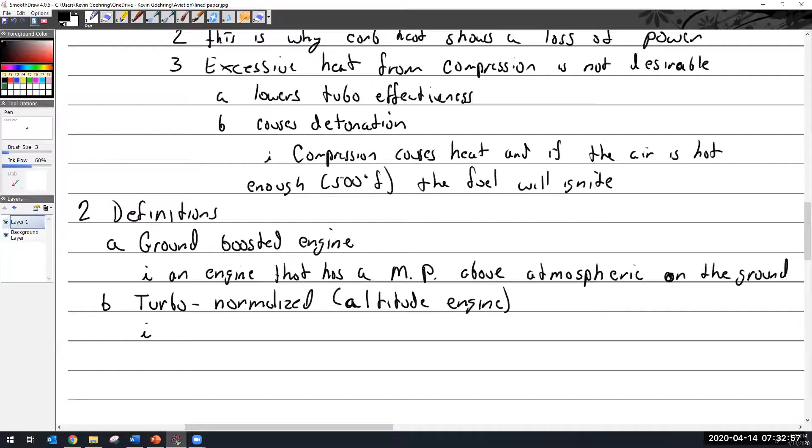So we talked about turbo normalizing and an altitude engine, which I don't like that term. That is a type of engine. The engine's not necessarily any different than any other engine. They tend to be a low compression ratio engine. Other than that, it's the same old engine. You just got stuff bolted on the outside.

So a type of engine that uses a turbocharger or supercharger. Remember, a turbocharger is something driven by exhaust gas, and a supercharger is something that is belt or gear driven, to generate sea level pressure.

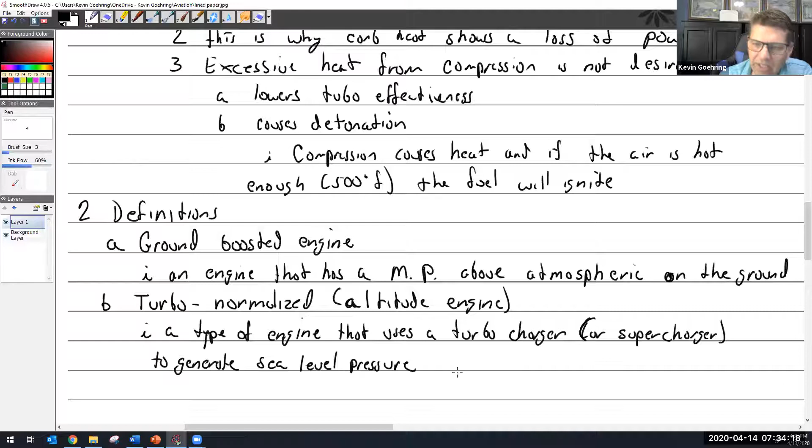Will it always be sea level pressure, or could you adjust it to a different setting? Well, you could adjust it to do whatever you wanted to. You could adjust it to give you more. It's like, yeah, I bought an aircraft and it was turbo normalized, but you know what, I own a flat blade screwdriver, so now it's ground boosted. You could do that. All it takes is a screwdriver to adjust the pressure regulators on it. But you don't want to do that. So if it's designed and operating properly, it will never give you more than sea level pressure.

Okay, that makes sense. To generate sea level pressure in its intake manifold, and that will be up to its critical altitude.

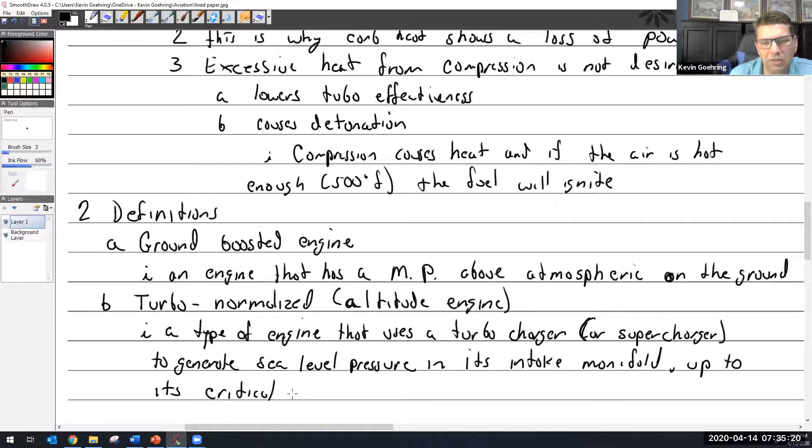Critical altitude, and I'll define critical altitude for you. So what is critical altitude? Critical altitude is defined as the altitude at which an engine can no longer produce sea level horsepower.

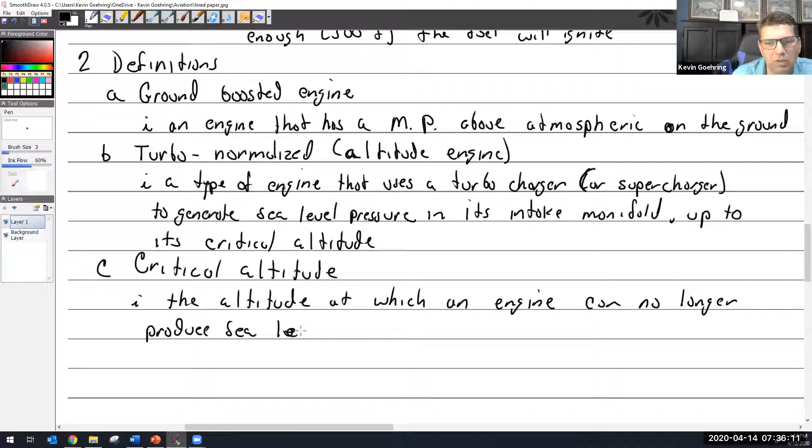All right, August, for 2 points. What is that for a normally aspirated engine? I thought he wasn't here. Well, I see a square. August, you with us? August, going once. Yeah, I'm here, sorry, I had something I had to attend to. Oh, so you're here but not paying attention. I got it, my apologies, I actually just got back. This is why I guess I don't call on people, it just embarrasses them. Oh well, hey, it's all good.

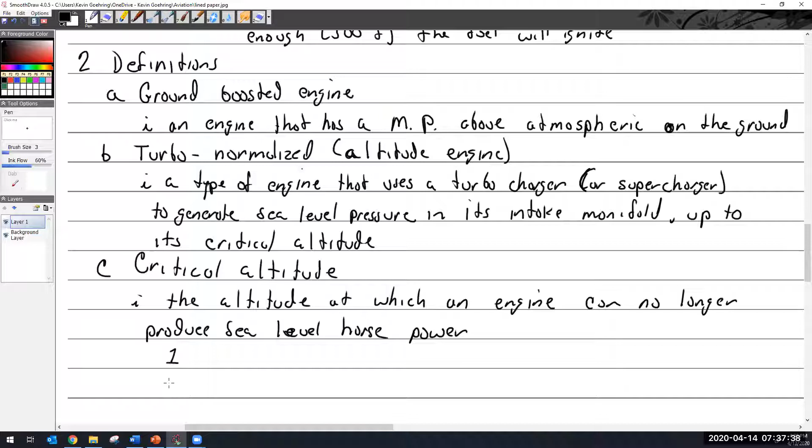It will be at sea level. It'd be at sea level, that's correct. So in a normally aspirated engine, and remember, normally aspirated engine means it has no turbocharger, no supercharger, in a normally aspirated engine, that altitude is anything over sea level.

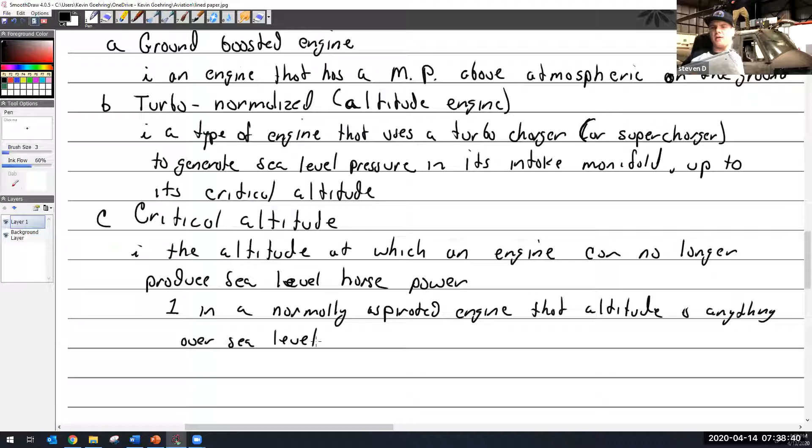So in my little Cessna 150, my critical altitude is 1 foot. 1 foot or 1 inch. Well, technically, it would be anything over where your engine sits on the airplane, because no matter what, it would be above sea level. That is true. Or your engine could actually be below sea level, like in the desert, and then you could be flying at 20 feet.

That's right. Now, if you want to go down to Death Valley and fly real low to the ground, then I guess you're going to get more horsepower, like 200 feet below sea level. But you have to be flying close to the ground, right?

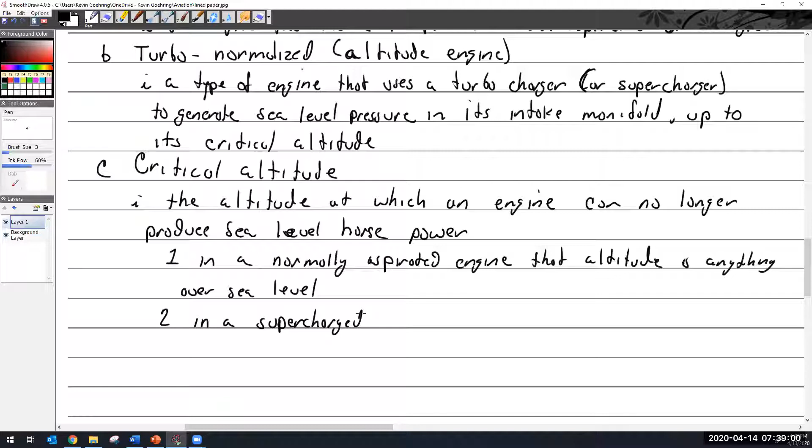In a supercharged engine, that altitude, that is the critical altitude, is much higher. 10,000, 15,000 feet, something like that. Depends on the engine and the manufacturer and how they have it set up.

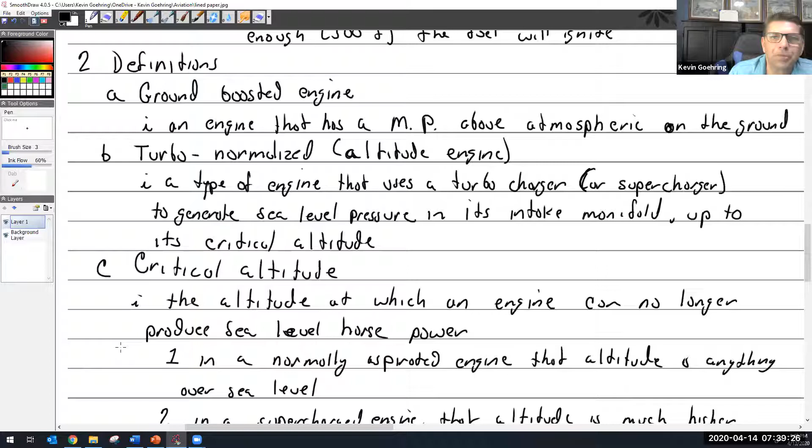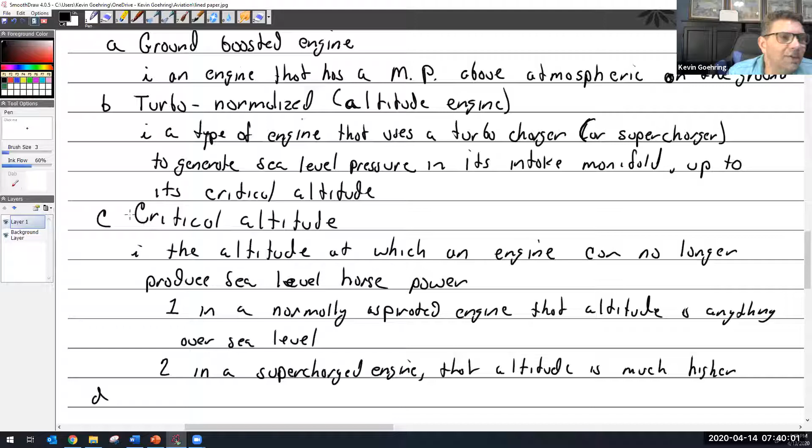Okay, so we've done ground boosted, which means it is boosted over sea level, and turbo normalized, which means that you just trick the engine into thinking it's at sea level for a much higher period of time. So if the engine had a thought process, it would think, hey, look at me, I'm at sea level and the air's hot, and I'm at sea level and the air's a little hotter, and I'm at sea level and the air's getting even hotter, and I'm at sea level. Now the air is really hot, and now it's like, okay, now I'm at 1,000 feet and the air is pretty hot, and at 2,000 feet and the air is pretty hot. It would do that. And the point where that engine realized it was no longer at sea level is what we call critical altitude.

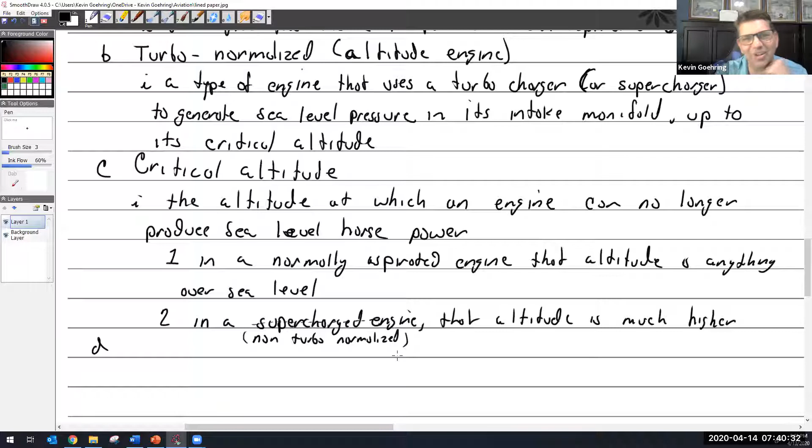So that's for a supercharged engine, or rather an engine that is not... I could have written instead of supercharged, a non-turbo normalized engine. So if it's, and I hate to use a double negative, not a non-turbo normalized engine, that is much higher. All right, D, I'll just bring D down to here. D, all right, supercharging.

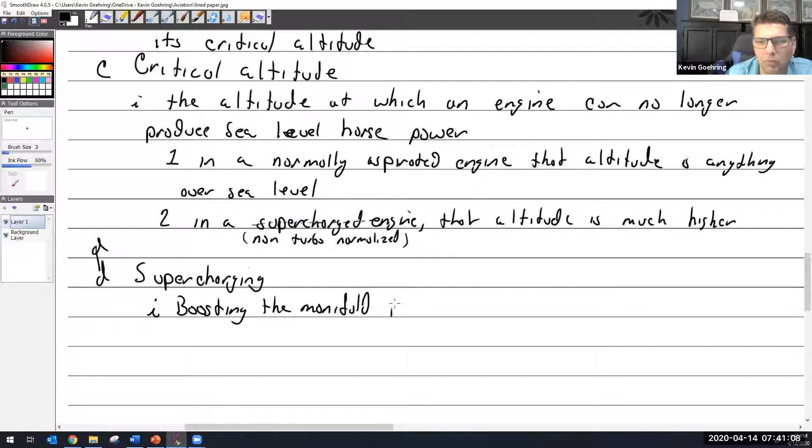Remember, there's a supercharger and supercharging—those are two different things. So I'll cover supercharging and supercharger separately. Supercharging, or as the manufacturer calls it, is boosting the manifold pressure above 30 inches.

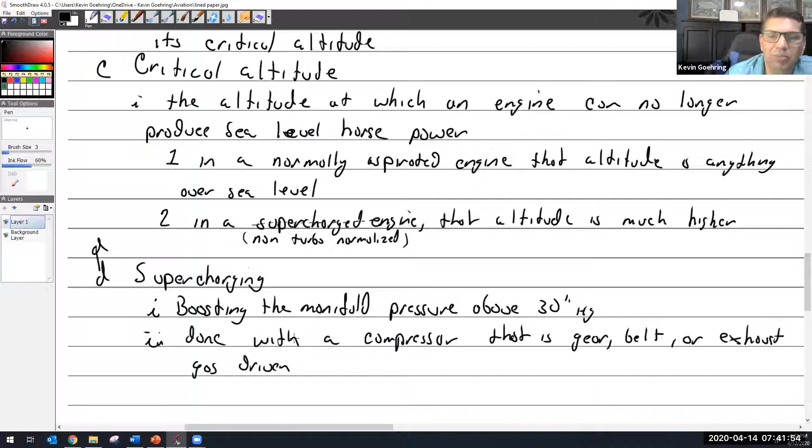How do they do that? It is done with a compressor that is gear, belt, or exhaust gas driven—just some sort of compressor. So supercharging means it has just some sort of compressor. The reason I tell you that is because Lycoming tends to do it this way.

Continental just says it's turbocharged, and they don't have a distinction in their name. Whereas Lycoming will say you may have a turbocharged engine, or you'll have a turbo-supercharged engine. So it's the distinction between the two—C-H-A-R. One is supercharging, the other has 'super' in it, meaning more than.

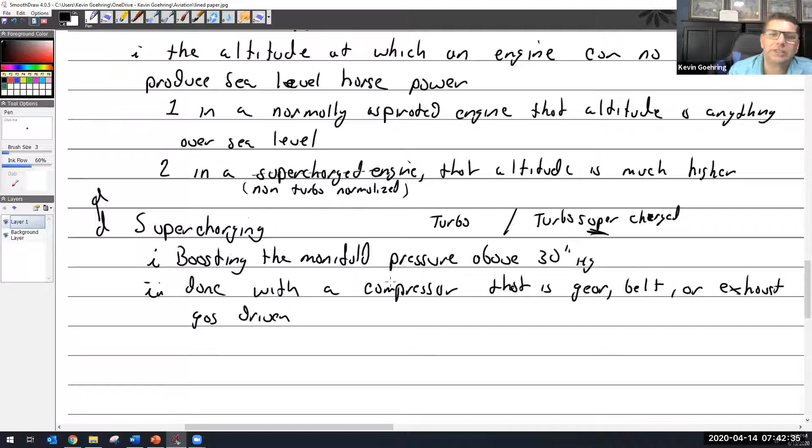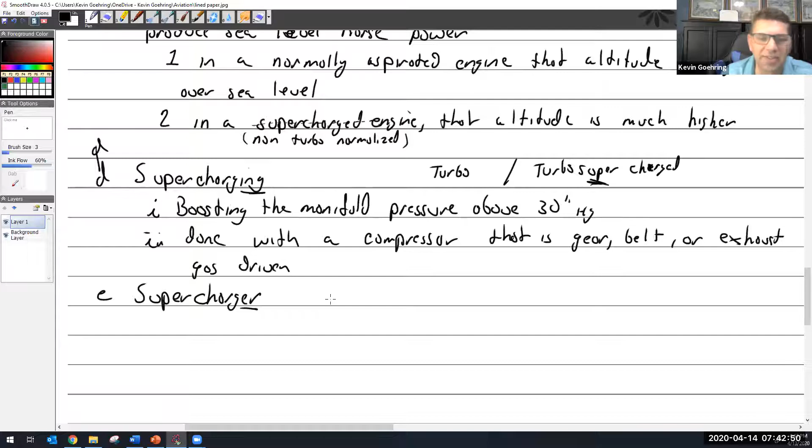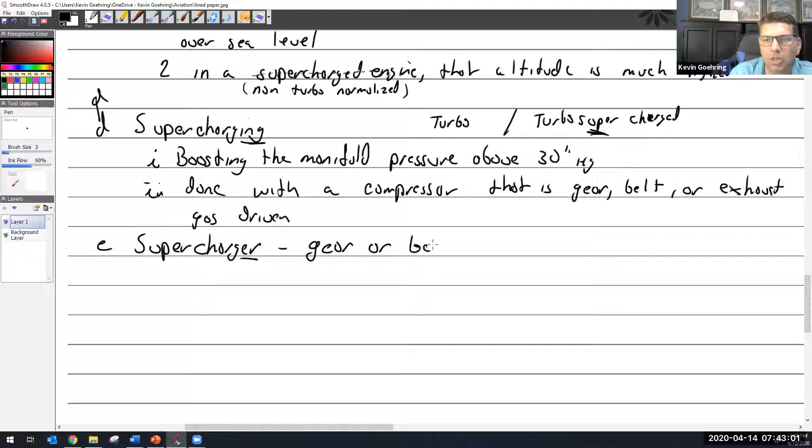There's supercharging, the 'ing', that's a thing that's done. And then I could say a supercharger—that's an item. A supercharger is a gear or belt-driven compressor.

Now, it just so happens that whenever you bolt on a supercharger, by definition it's a gear or belt-driven compressor that boosts manifold pressure above 30 inches. You don't have a supercharger that does normalizing—there's no such thing as a supercharger normalizer. When you add these superchargers, you're using a compressor, you're boosting it.

Now, if we take a look at radial engines, you guys know that radial engines have an internal supercharger, and the Lycoming R680, a 9-cylinder radial engine—if you were to take it apart and look at it, you would see an internal supercharger, but it's not. It just looks like one, tastes like one, acts like one in all respects, except it doesn't boost anything. So if it doesn't boost anything, it's not a supercharger—it's just called an impeller. All it's there for is to mix the fuel and air.

It's like the same thing in the 985, the Pratt & Whitney, or the cutaway mock-up we have in our lab—you spin the crap out of that impeller, now you start boosting the air, and it's a supercharger. So you either have an impeller or a supercharger. There's no such thing as a supercharger-normalized engine, so don't get into that. It's only something you do with turbochargers.

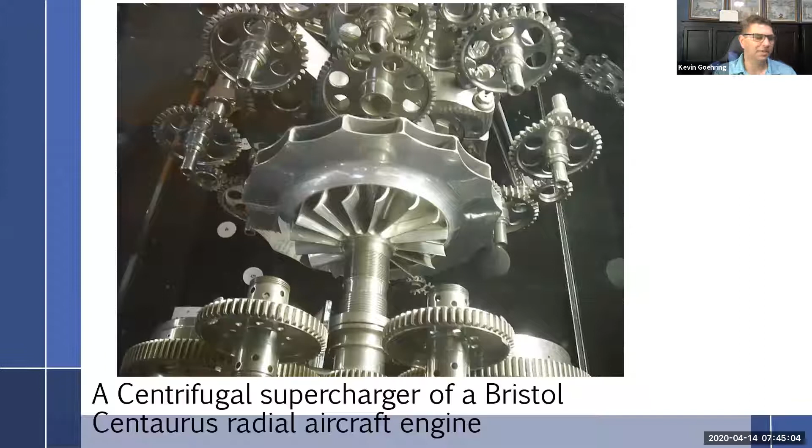Alright, so I have some pictures that might make more sense. Let me pull this over—we'll start with this current slide. This particular engine is a centrifugal supercharger out of a Bristol Centaurus radial aircraft engine. I found it on the internet—whoever took this picture, I love it. You can see all the gear mechanism that would be in the accessory case, and somewhere in the middle you have this impeller, which spun fast enough becomes a supercharger.

What kind of compressor is that? Centrifugal—it says it right there. Air comes in the middle, is spun to the outside, compressed, and goes around to the cylinders. Based on our studies with the pressure carburetor, the fuel and air is already mixed at the pressure carb, put in here, compressed, spun out, compressed again. So there's an integral supercharger.

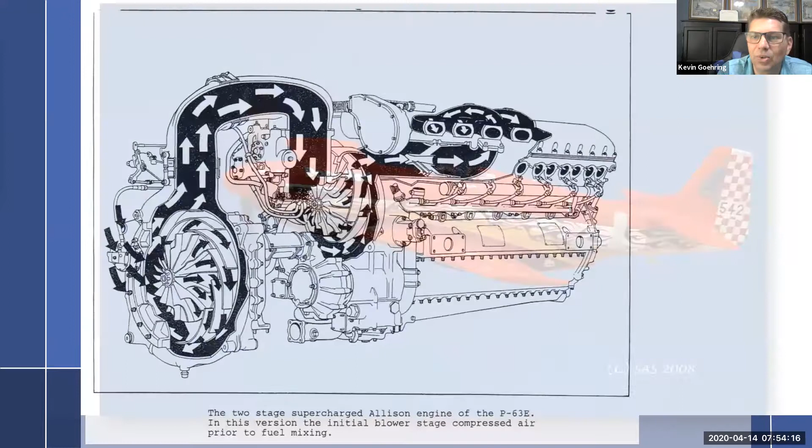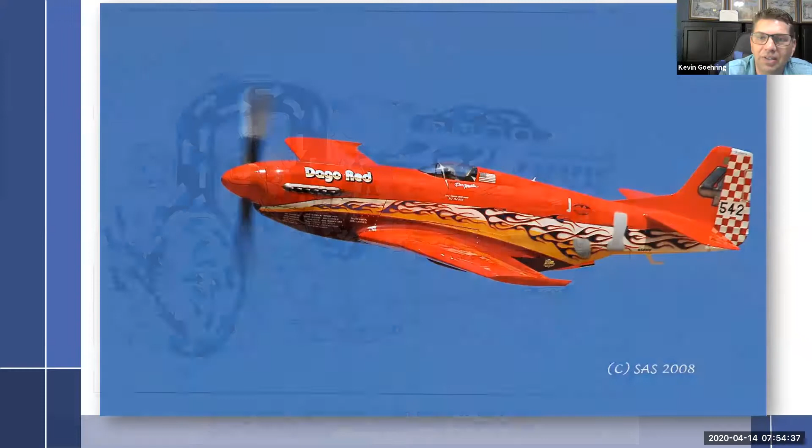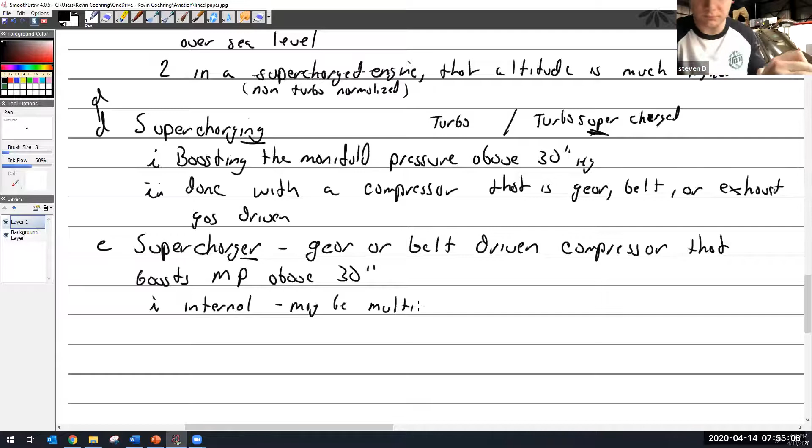So, okay, and we can get rid of this. All right, so supercharger, and let's see, so that was, I showed you two types. We had the internal, we could say maybe multiple stage. And then I showed you the external belt driven.

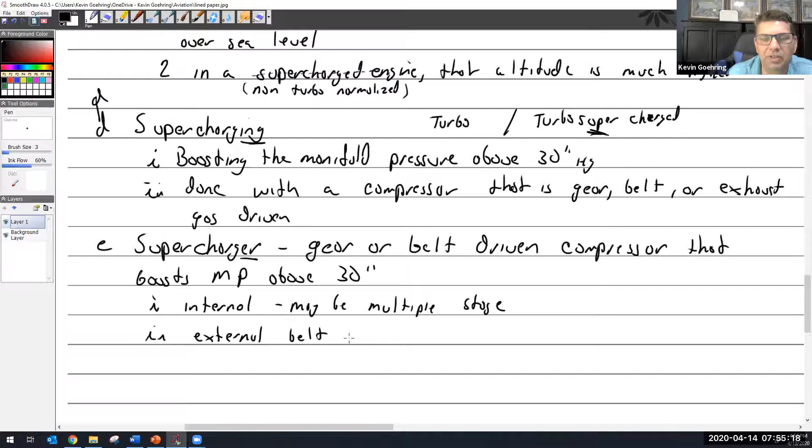There's some really old movie, I think it was like Mad Max or some stupid thing, where he had some sort of car with one of these big blowers on top, but he had it hooked to a switch where he could turn it on or off. That always bugged the heck out of me, because it seems to me when you're looking at a blower like that, it doesn't have a bypass on it. So I always thought that wouldn't work. Getting way off the subject here, but you see.

So if air is coming in, it has to come in and through here and up in this case, and there it goes, comes in here and around. There's no way around, so if this thing isn't spinning, it looks to me like it would block the air. I don't know how it would get around. That does not make sense. It would almost have to have like a double intake with the supercharger being on a clutch. Yeah, it was like a clutch like you'd see on an air conditioning system.

All right, so we had the external belt driven. Like I said, I've never seen this in aviation use, and I'm just going to say it's the Roots type. You'll talk more about the Roots type blower when you get into cabin pressurization. There are actually some aircraft that use some of these things, old aircraft. All right, so then we get into the turbocharger, which is where we're really going to spend most of our time here. And a turbocharger is an exhaust gas driven compressor.

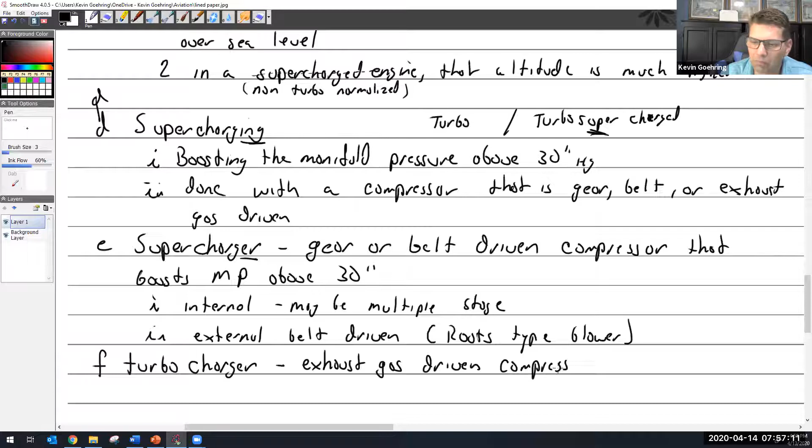Excuse me, Kevin, on the supercharger, do you need to cool the air? Because when you compress air, it becomes more temperature, right? It becomes hotter. So do you need to cool the air?

Well, it really helps. When you do cool the air, that's called an intercooler, and we'll talk about those. But intercoolers add restriction, and restriction means you have to boost more, and you have more weight, so they add complexity. But you can't see that with this supercharger.

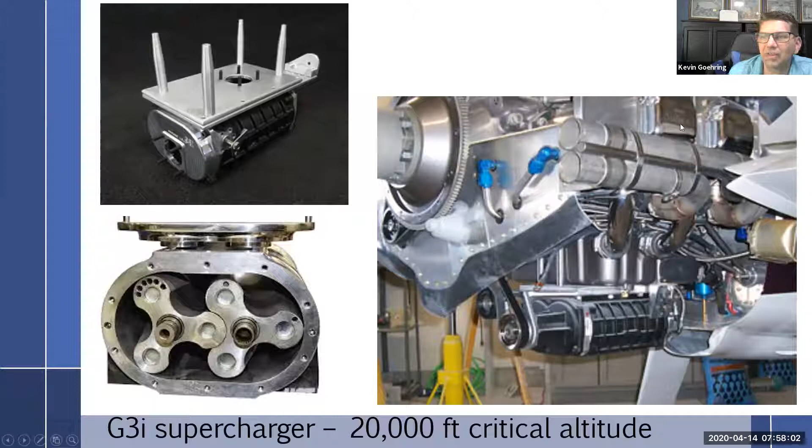All this supercharging, so there is no intercooler. There's no cooler between here and here. You guys know how this works. The carburetor is going to bolt on right back here. So air is going to come in, go through the blower, the supercharger, right up into the oil sump, into the intake tubes, and right off into the cylinders. Boom, in, down, done. Nothing else.

We look at this type, we could put some sort of intercooler right in this section, but it doesn't appear to have one, and I've never seen one on this one. I'm not an expert on this one by a long shot, but I don't see any intercooling at all. So the air just gets much, much hotter. That can cause detonation, right?

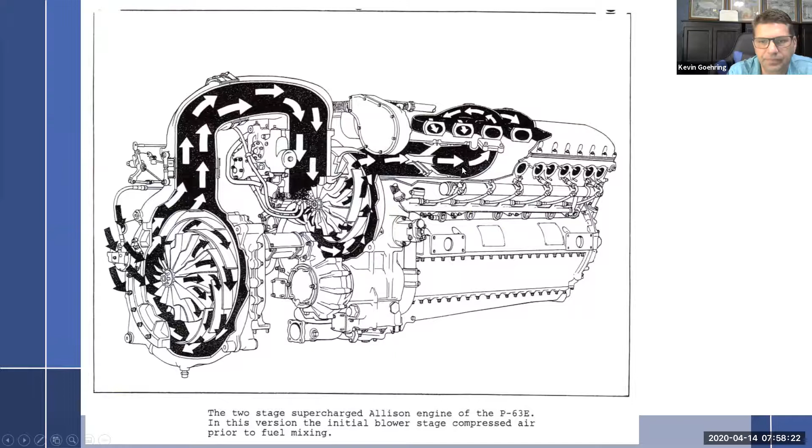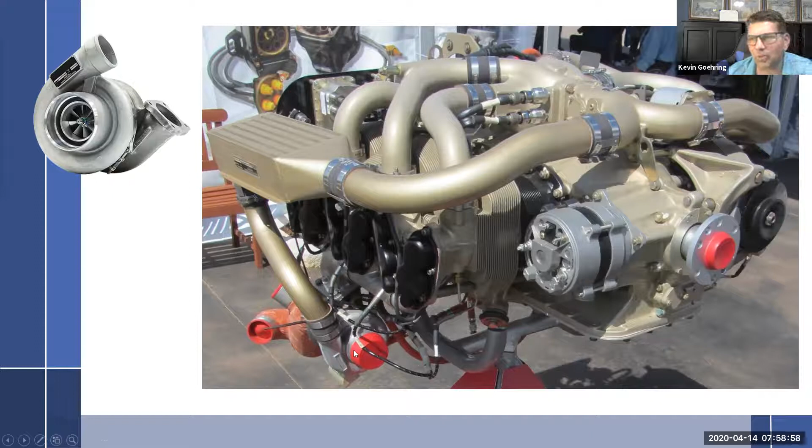So you can see the turbocharger here. It's probably a twin turbocharged engine. I don't know, I just stole it from the internet. So exhaust is going to come through here where this red cap is. It's just capped off right now for whatever purpose — it looks like it's a trade show and they capped it off.

So exhaust is going to come through here, it's going to drive the exhaust, the compressor is going to spin up — I'm sorry, suck in air through here. That's the air inlet, exhaust is over there. So it sucks it up through here, spins it through here, and it's going to go through an intercooler on both sides, probably.

Follow it through, it's going to go right into the throttle body, which you know what looks like now on a Continental — it doesn't have a venturi at all. So it's going to go through there and then right down into the cylinder. And then here is the fuel injection line right there, coming off the fuel pump, and you know how that looks.

So if you have a supercharger without an intercooler on an engine, is the life of that engine most likely going to be cut in half? I wouldn't say that, I wouldn't say it'd be cut in half at all. You're just not going to get the performance out of it, correct, from that supercharger or turbocharger?

Well, again, I've never seen an intercooler on a supercharger, never even heard of one. They bolt right on, right into the intake. So no, I don't think they ever made intercoolers for superchargers. I don't know.

They make them for turbochargers. Yes. Not most airplanes — I would say most aircraft, no, I don't know. Most of the ones I worked on did not have an intercooler. That seems to be more of a Continental thing, seems to put them on a lot more commonly.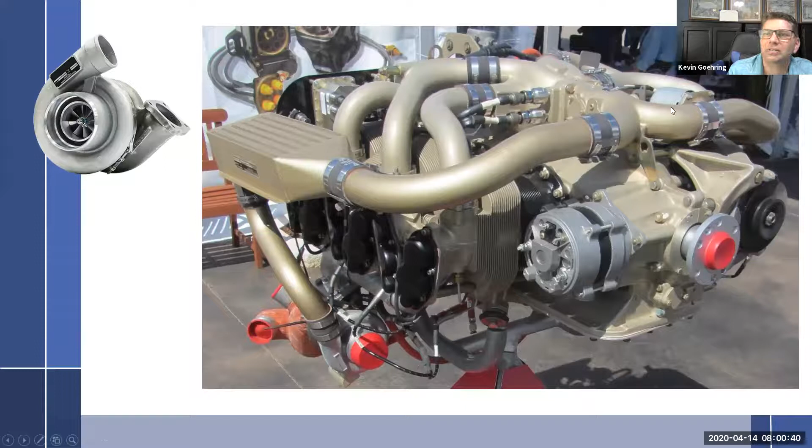No, over here is one of the turbo controllers right there, you can see it hanging out up there. All right, let me see — we'll just go with this slide, I'll come back to it later. But just so you understand the basic operating principle of the whole thing.

So air comes in, we know that, goes into the engine, works, and exhaust gases come out. The exhaust gases get to a point and go one of two ways: they can go out the wastegate — this is called the Y, they go through the Y, out the wastegate, and do nothing — or as the wastegate closes, it forces the exhaust across the turbine wheel. The turbine wheel, of course, you know how that works, is going to in turn turn the compressor. The compressor then compresses the air that goes into the engine. So it kind of helps it back and forth, one helps the other — that was a weird thing to say.

But anyway, we'll get into that. So the more the wastegate is closed, the more the turbine wheel gets the exhaust, the more it drives the compressor. So this wastegate right here, we're going to talk a lot about it — that's the throttling device for that right there.

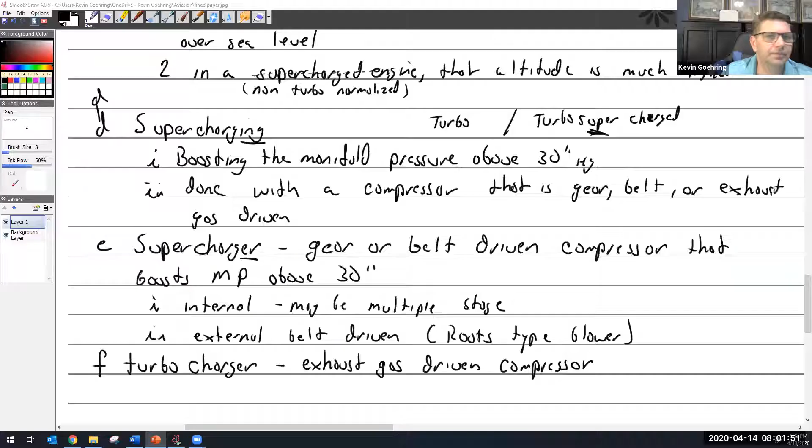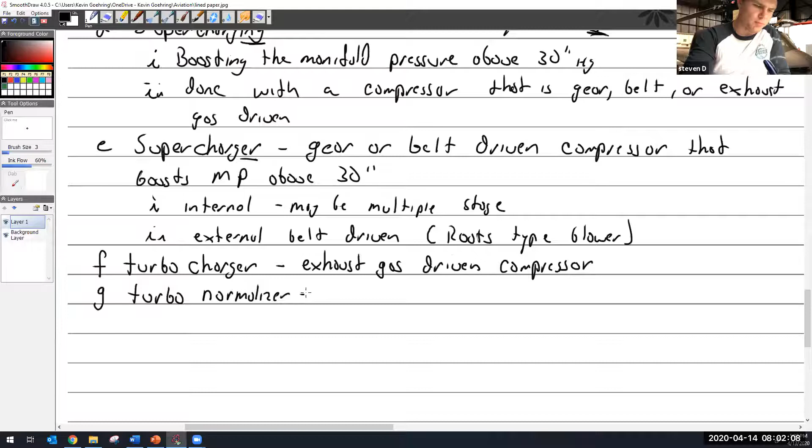The turbocharger is an exhaust gas driven compressor. And we're just going to hit these words one more time: so we have a turbo normalizer. Turbo normalizer — it does not boost the manifold pressure above 30.

We have a turbo supercharger. Or did I say charged? It's turbo supercharged, then it boosts the manifold pressure above 30 inches. Not all manufacturers use the word turbo supercharged - some just say it's turbocharged. So is it boosted or not? You just have to know the aircraft and know if it's going to do that.

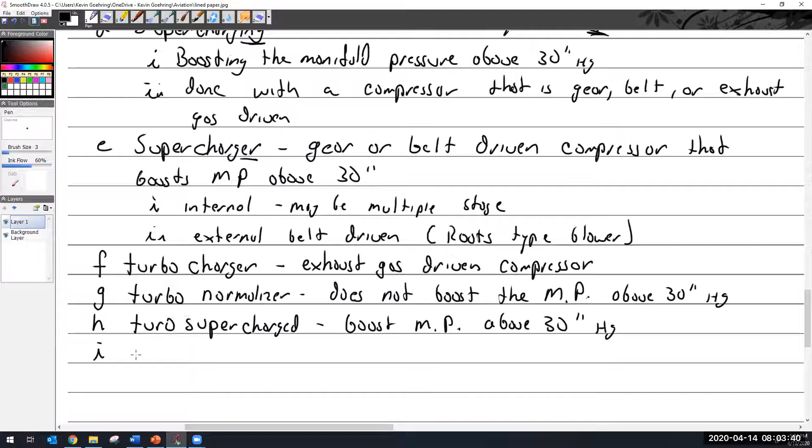You hear that too, right? So Zach, what are you up to? You playing games or are you actually driving around? Is that a turbo on his computer? Oh okay, that's his turbo noise. When you showed the picture with the wastegate on it, I immediately thought of this video I saw with a turtle who makes this noise every time they shift.

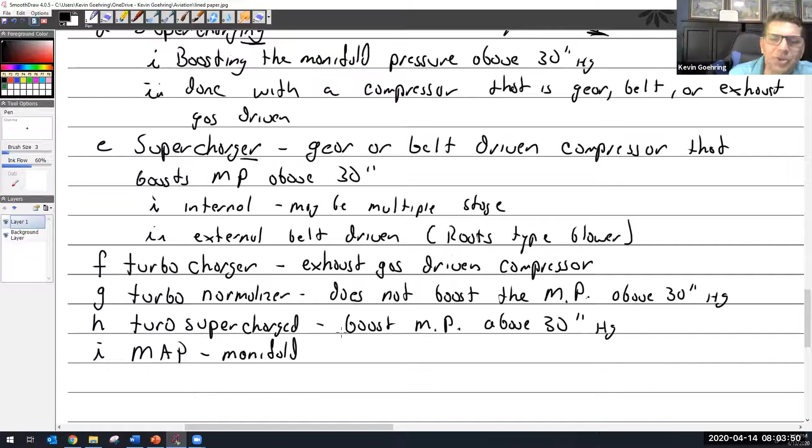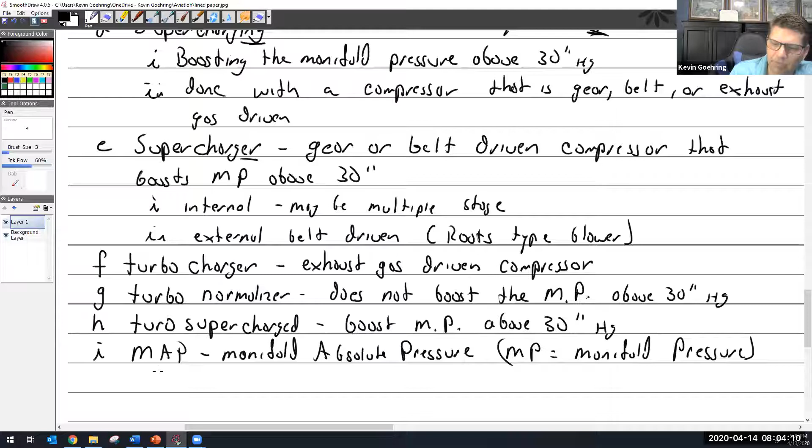I watched it. Okay, the MAP, also called the manifold absolute pressure, or MP for manifold pressure. Manifold pressure - alright, and then we're going to talk about a lot. We'll just say manifold pressure, manifold absolute pressure.

I want to be careful here, I always say this. We'll say this is the pressure in the intake system, pressure in the intake manifold. The intake manifold, throttle to cylinders. Throttle to cylinders - yeah, I like that.

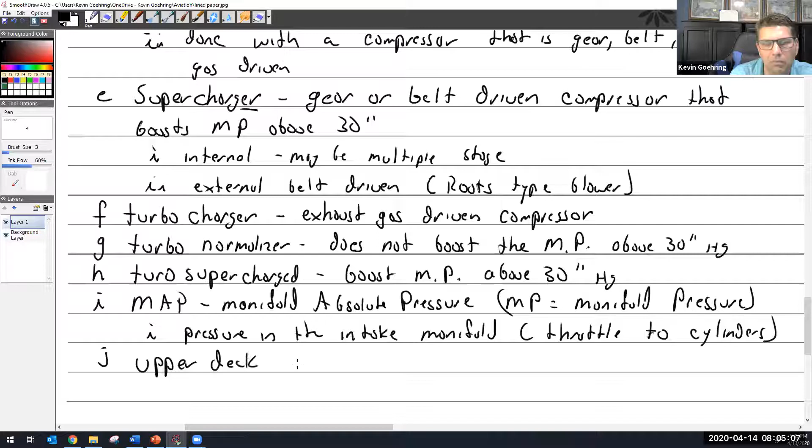Alright, and then we're going to talk about upper deck pressure. Upper deck pressure will be defined as pressure from compressor outlet - sorry, I got an extra pen mark - outlet to throttle plate.

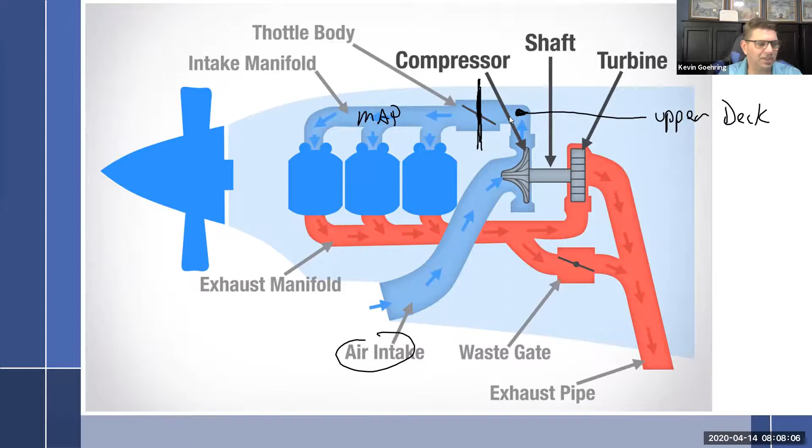Discard. Alright, upper deck pressure - so the upper deck is right after the compressor and before. Compressor, yeah, we could call it compressor outlet, but then civilians would know what we're talking about, and we wouldn't be cool. So we call it upper deck. Now civilians have no idea what we're talking about, right?

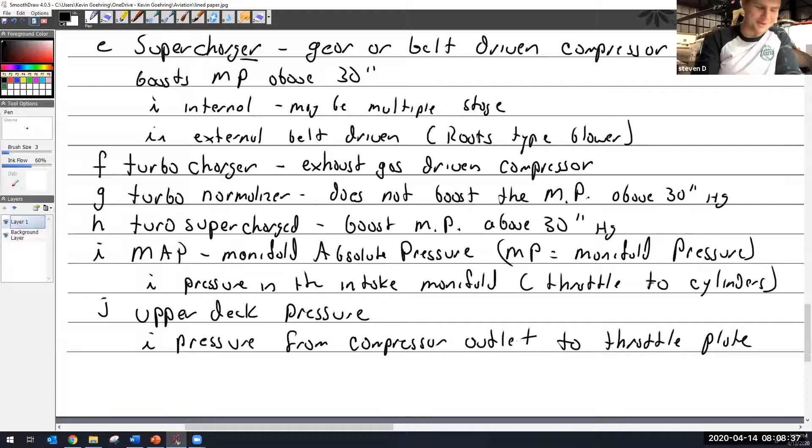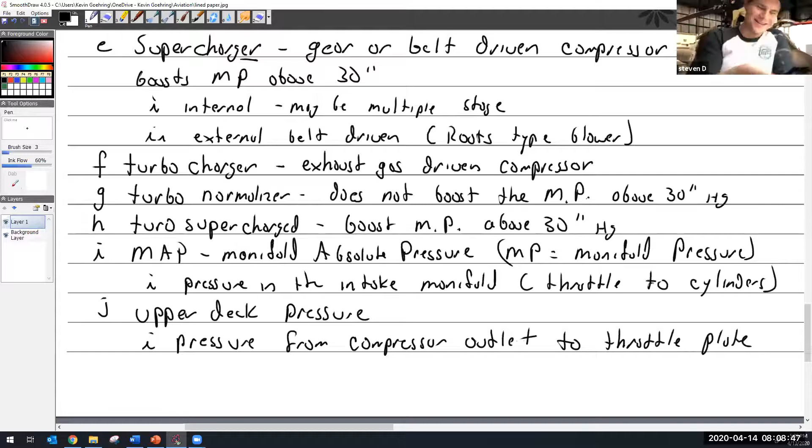What are you drinking? The same thing I drink every day: peach tea. Okay, never mind, it looks like something else for a second. Is that what you call it? It's what I call it. Well, peach tea, peach schnapps, I mean, it's peach. Some peach. Alright, you guys all good here? All right, it is peachy. That was good, Hector.

Alright, moving on. What is the purpose? Let's put all this together. The purpose of turbochargers and superchargers is to increase the manifold pressure, the MAP, manifold pressure, above the pressure of the atmosphere. Now, is that always true?

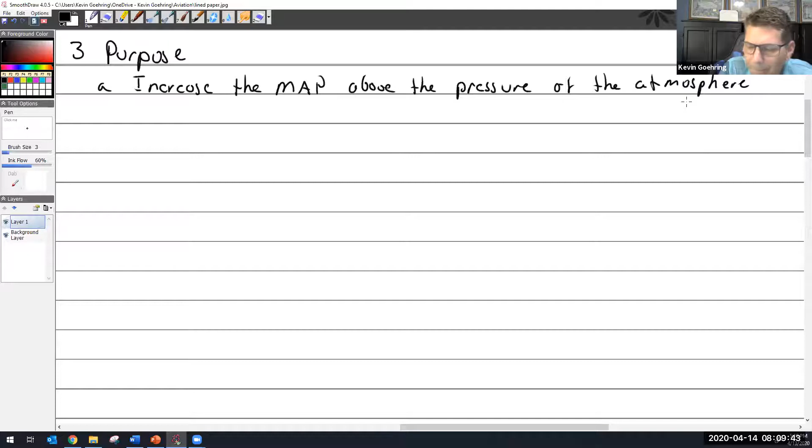Okay, what's the exception? The turbo normalizer on the ground. Remember, as soon as I start going up in altitude, which is the whole purpose of the aircraft, I'm going to start leaving behind that sea level air, and I need the turbo.

So really at that point, once I leave the ground, this is true. You do want it to increase the manifold pressure above the pressure of the atmosphere, because the atmospheric pressure is suddenly becoming a lot lower as you go up. That's what it's there for. That is its purpose.

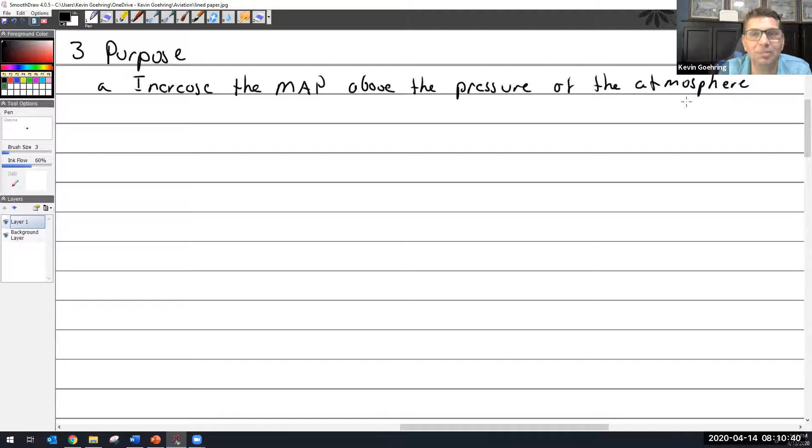Now it just happens to be set for 30 inches. So if you don't need the 30 inches, or if you're already getting it, then it's fine. But above that, once you start climbing in altitude, you lose the pressure, and the turbocharger is supposed to increase the manifold pressure above the pressure of the atmosphere. That's its job.

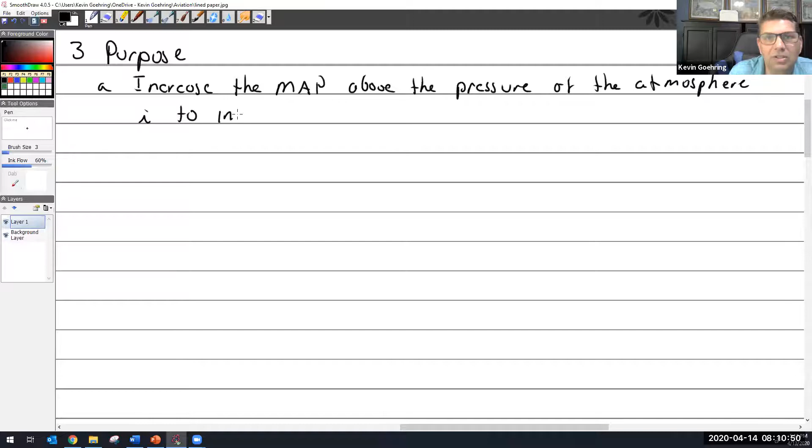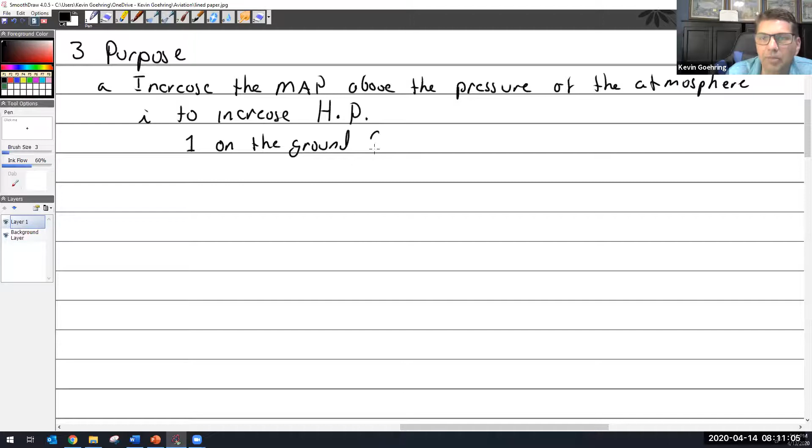Sometimes it may do it on the ground, and that'd be for ground boosted. Ground boosted, or at altitude, for ground boosted, or normalized engines.

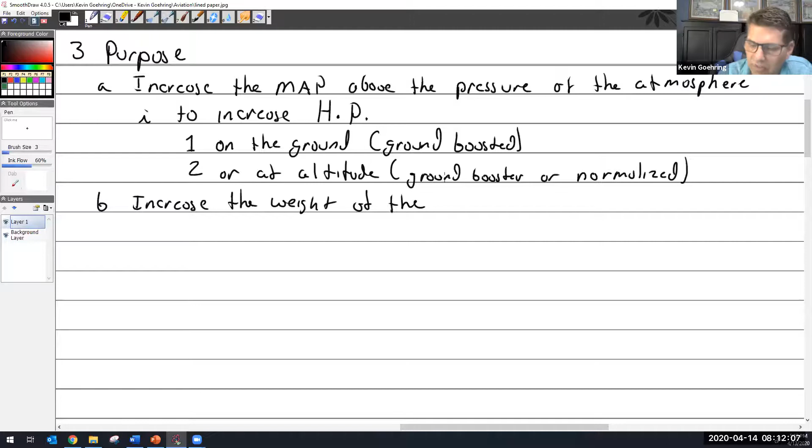All right, so increase the manifold pressure. How do we increase the manifold pressure? Because we want to increase the weight of the, well, I'll say fuel-air mixture, delivered to the engine.

And as I said before, increased pressure means increased weight. Or I could have said the other way around since I said weight there, but hopefully you get the idea.

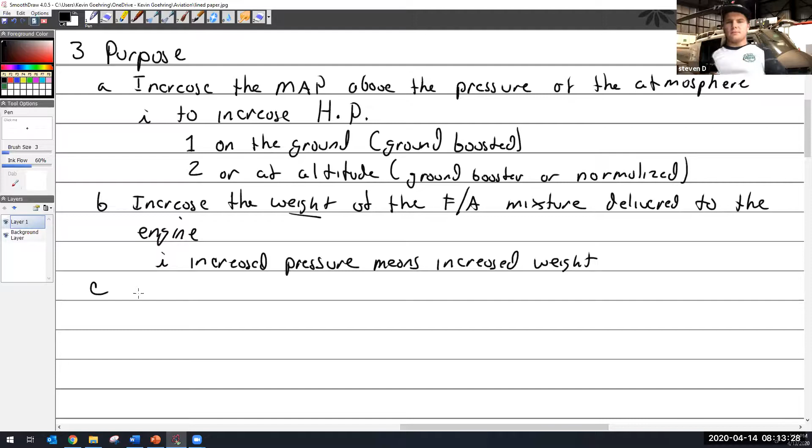All right, and by doing so, do we increase the compression ratio? Yeah, I got a yes. No. We are not increasing the compression ratio. Compression ratio, remember, is the difference between the volume of the cylinder at top dead center versus bottom dead center. We're not changing the ratio. Ratio stays the same, but we're putting more air in there so we can increase the volumetric efficiency. That's different.

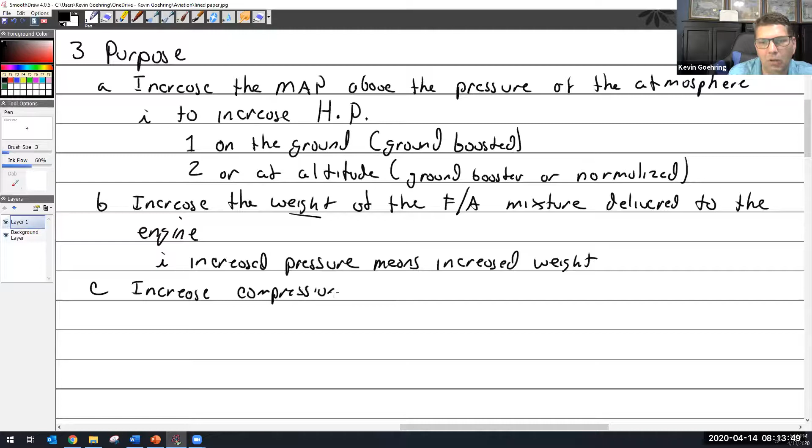All right, let's see. This does, though, increase the compression pressure, not the ratio, just the raw pressure. So the compression ratio is constant.

That doesn't change. The only way you can change that is by changing the piston, the crankshaft, or a rod length. So the greater the pressure...

This is all review, hopefully. The greater the pressure in the cylinder at, we'll say, BDC, bottom dead center, or the beginning of the compression stroke, obviously the greater the pressure at TDC, at the compression stroke.

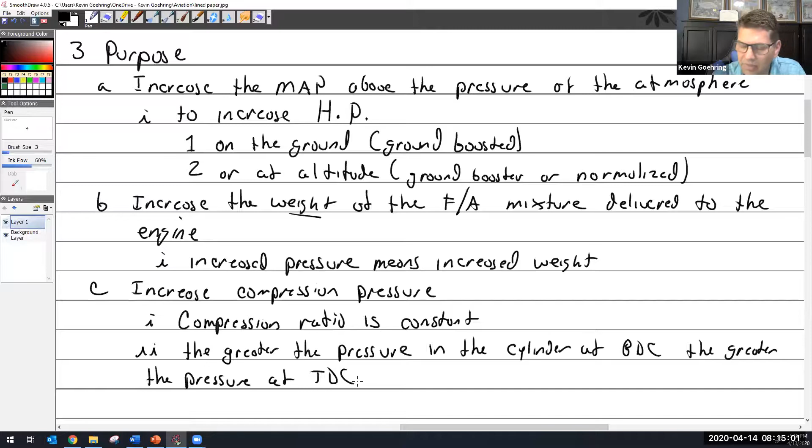And that was because of, as we already said, well, not because of, but why does it matter? Because of the power formula, which is pressure, the stroke, length of stroke in feet, the area of the piston, and the RPM and number of cylinders.

So if you increase any one of those - the pressure, the stroke, the area of the piston, RPM, or the cylinders - you get more power. And as we already know, we cannot change the stroke because it's built into the engine.

Unless you have one of the new Nissans that do that. I shouldn't have said Nissan - what's the Nissan luxury version? The Infiniti. They have variable stroke engines. You cannot change the area of the piston, even if you have a Nissan. You cannot change the number of cylinders, although Cadillac, I think, and several manufacturers - Cadillac started that - but not in aircraft engines.

So that leaves us with only two things we can do to manage our horsepower as a pilot: pressure or RPM. If we bolt on a turbocharger or supercharger, we can adjust the pressure. And if we spin it faster, we can get RPM, but we can only spin it so fast because of what limiting factor?

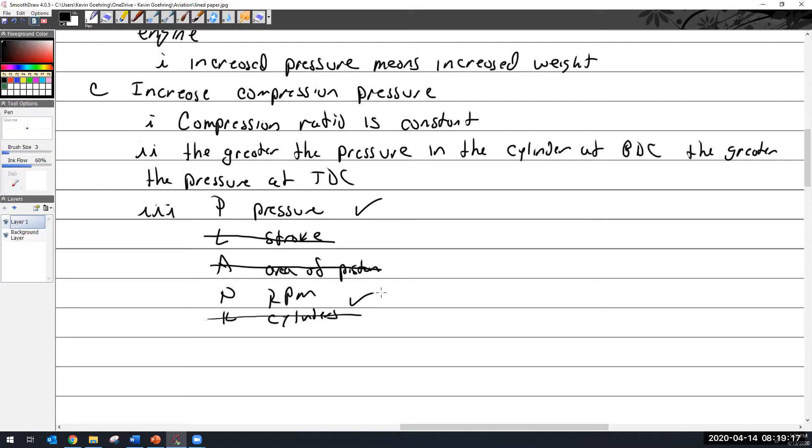Well, that's why you go from a fixed pitch to a constant speed propeller, right? Now let's back up and look at this question. When we're talking strictly engines, forget about the propeller. We're just trying to get shaft horsepower out of this thing. So how do we get more shaft horsepower? You have to increase one of these things to get more power out of the engine. Just end of story, right?

And so what I'm saying, my idea, and everybody in aviation agrees with me, is that you can only spin the propeller so fast because the propeller loses efficiency. That's a propeller problem. So that limits how fast I can spin the engine.

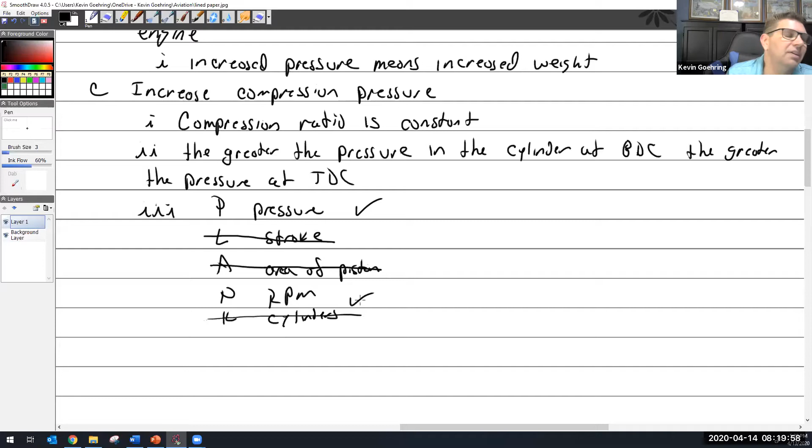Take an example in your car. What is the limiting factor in your car? It's really RPM and what the engine can handle before it starts to eat itself to pieces. But if it wasn't for that, you could just increase the RPM instead of redlining it at 7,000, redline it at 50,000, you'd have all kinds of horsepower. Instead of a 7 or 9 speed transmission, just put in a 30 speed and keep going. Would that work? That wouldn't work.

I got off on something there that probably wouldn't work well. But anyway, just spin the engine faster, you wouldn't need more gears, just spin it the hell faster. All right, but in aircraft we can't do that because the prop limits it. In cars you can't do that because the engine will eat itself up if you go too fast. So that leaves us with pressure. If we can boost the pressure, we get more horsepower, which is what you're seeing now out of all the cars that are being made, right?

Like I was looking at replacing my car at one point, and my car has a naturally aspirated V6. They don't even make that anymore. The only thing I can get for that is a 4-cylinder turbocharged. So they're making the engine smaller and smaller and putting more and more pressure in them. They're making the stroke smaller, the area of the piston smaller, and the number of cylinders went down. So this went down, this went down, this went down, and the horsepower did go down a little bit. But to try and keep it almost the same horsepower, they're going to spin these engines faster, and they're going to boost the pressure up so that it all equals out.